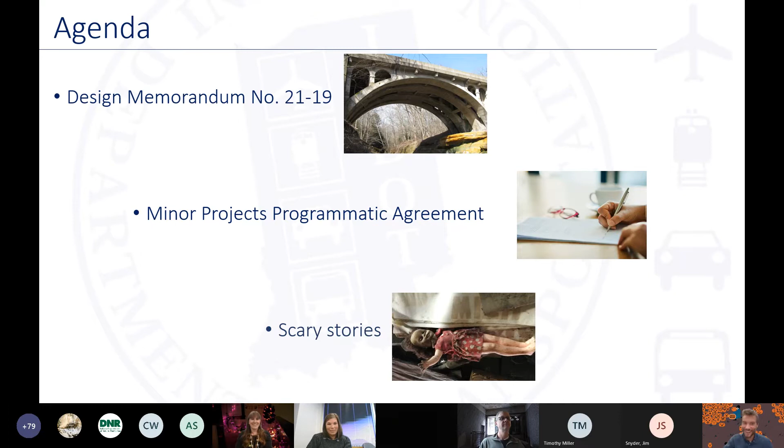So Stephanie and I are here to go over Design Memorandum 21-19. Hopefully most of you are aware of it, either through the environmental listserv or the design listserv, that it did get issued back in September, and it was effective immediately. And any design memo on this one can be found on our website.

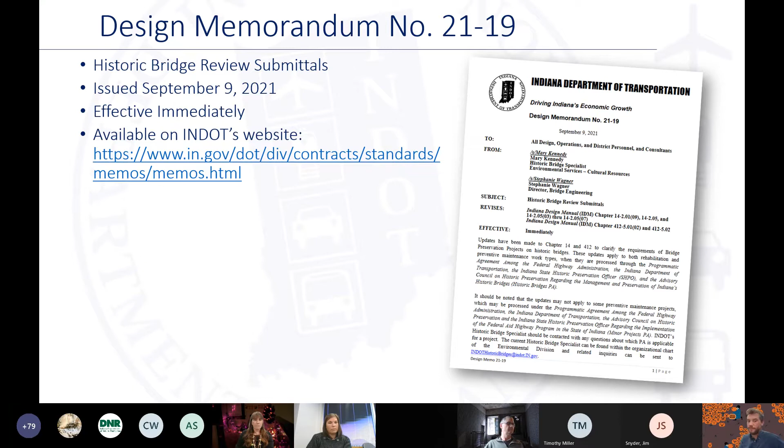So you might wonder why we issued this memo at this time. What's the intent behind this? Basically, it's to provide consistency across the different parts of INDOT, across our different documents, to make sure we have the same guidance in our documents across the board. So these, mainly, it's related to the plan reviews.

In the Historic Bridges PA, which was signed and executed in 2006, it says in attachment B for the standard treatment approach for rehab projects that there should be 3 plan reviews that go to the SHPO for 30 days, at approximately 30% complete, 60% complete, and the final design.

And so that has been around since 2006. It's not something new. We should all be aware of it, but our implementation of it over the years has been pretty inconsistent in terms of how many of those reviews did get done. Some projects might have one or two of them. Some projects did have three, but there were quite a few that didn't have all three of those reviews.

And so we had conversations with SHPO and Federal Highway over the years about the lack of consistency in that, and came to agreement that yes, we need to enforce this. This is in a PA. This is something that we don't want to jeopardize our relationships with other agencies or other consulting parties, the historic bridge preservation community. We need to make sure we're upholding our part of the bargain here and having these reviews done.

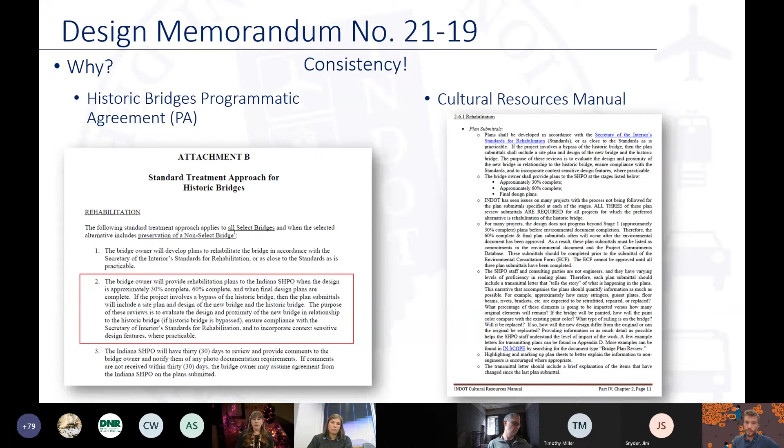So it's just bringing everything up to a consistent format, consistent guidance. So this is just a table outlining all the revisions that were made, and we'll go over each one of them briefly.

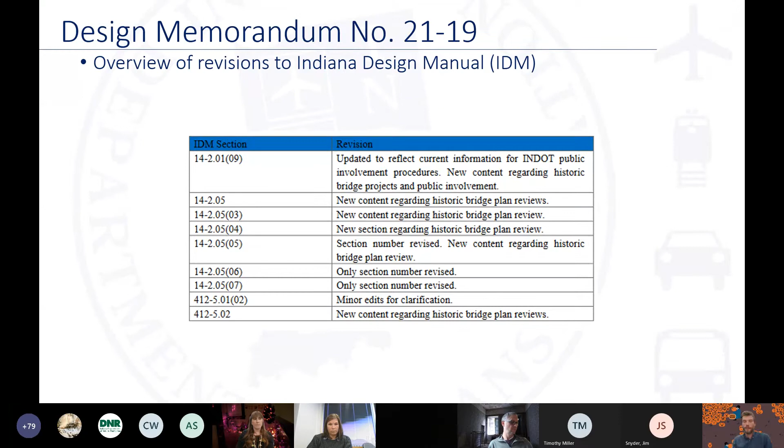The first revision made in chapter 14 was in the section dealing with public hearings. We took this opportunity, since we were making revisions anyway, to provide clarification and updates on public hearings in general, because in the past couple of years INDOT has changed the public involvement process quite a bit, going from centralized public involvement to having the districts manage and control that. So that decentralization, we wanted to update the language here so designers know that public involvement now, you're going to the district staff for that, the project manager.

Another thing we wanted to put in here is that any project processed under the Historic Bridges PA does require a hearing. I wanted to make that clear. We did note that there are sometimes minor project scopes that don't go through the Historic Bridges PA, and they're processed under our minor projects PA. In that case, you don't have to do a hearing, because that hearing requirement is tied to the Historic Bridges PA. If you have a very minor scope of work, some of them in the past we've done is just bridge painting, or maybe some minor sidewalk repair or railing repair, something like that. It might fall under the minor projects PA instead, and it wouldn't have that hearing requirement. Always coordinate with our office if you have a project that you think might fit under that, and we will work through that process and figure out how to get through it.

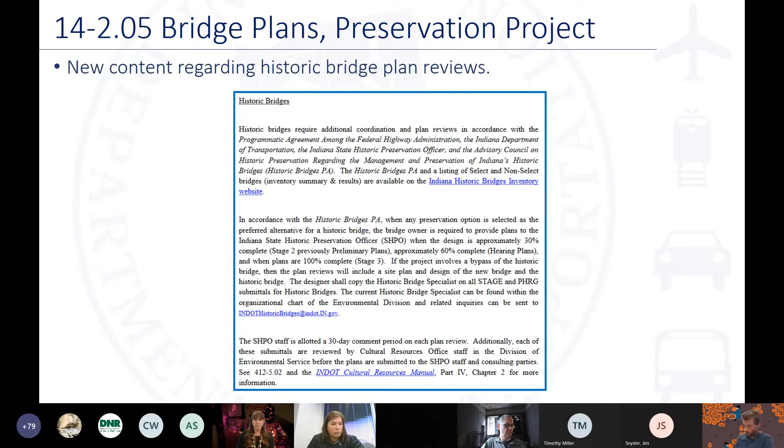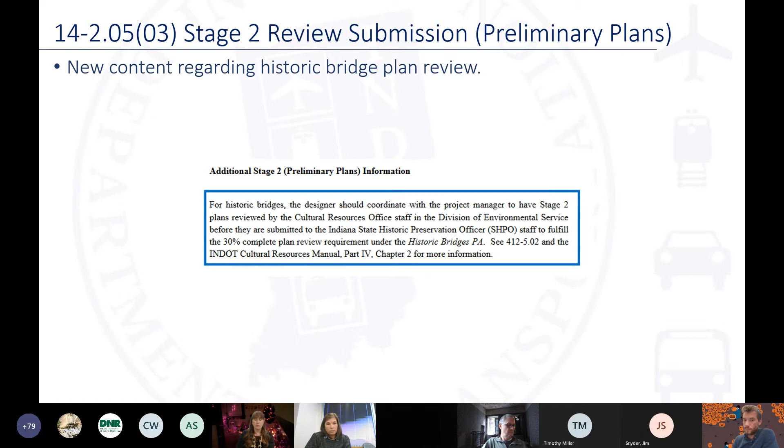Next slide. The next couple of slides just show the different places where it talks about the different stages of plans where we added that there is a historic bridge review that needs to be done. This was related to preliminary plans.

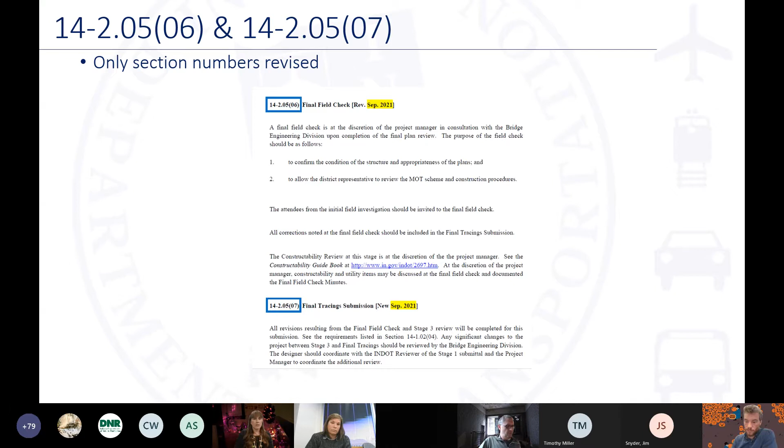Then we just had a couple of sections that needed a revised number as a result of us adding some things in. Moving on to chapter 412.

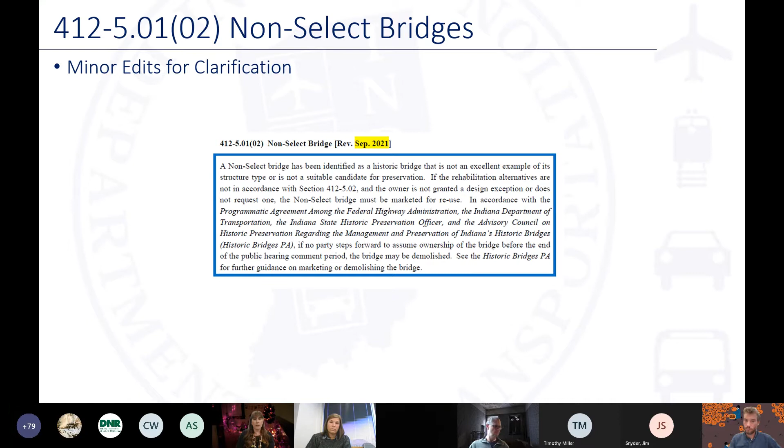We made a minor revision related to the definition of a non-select bridge. We realized that we hadn't quite copied exactly that definition from the Historic Bridges PA, so we were just clarifying some of the language in there so it matched up with the definition that was in the Historic Bridges PA.

And then again, in chapter 412, we have the plan reviews specified out, especially where we're talking about the Historic Bridge alternatives analysis, recognizing that those plan reviews are coming down the line as well, and the comment periods associated with them. We also put in there that if you have plan reviews outstanding when you're working on your CE document, those need to be in the commitments for the CE document. We have to have those in the project commitments database—we want to track those, follow those, make sure they get implemented. We need those plan reviews to occur before the environmental consultation form is submitted, so you can show in that form when they occurred—we sent it to SHPO on this date, they commented on this date—for each one, to show that they've been completed.

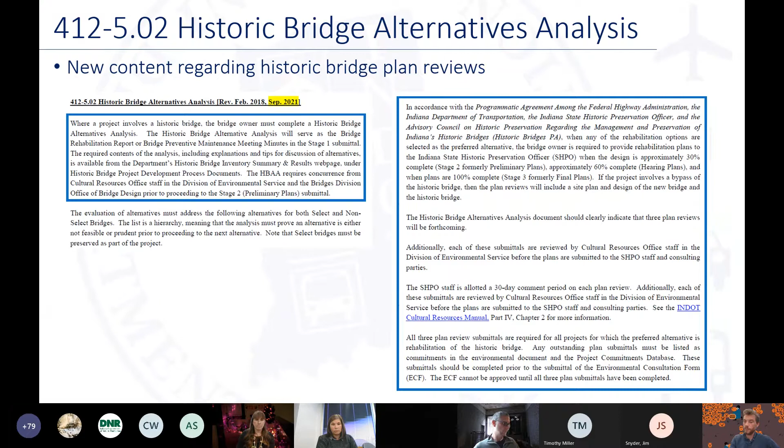So we did have a couple of questions that came up when we published the new design memo. I'm just going to summarize it. It's very wordy on the screen because it's very technical, so I'll try to summarize it, and then Stephanie's going to provide the response we have to the questions.

The first one was related to LPA projects, saying that for an LPA project, you're only required to submit stage 3 for INDOT review, for the bridge group to look at those. So when we have these other plan submittals, how should we go about that? Who's going to get them? How's that going to work when technically for LPAs, only that one is required on the design side of things?

This is a good question. The LPA project development process does reduce the required submittals for LPA projects, but the historic effort and coordination supersedes those requirements. So those are still going to need to come in for the stages we've set out in this design memo. They can be marked for bridge coordination only when you submit them through ERMS, and that way we know that's the purpose of this submittal. My team probably will be reviewing them in some capacity as we support Mary and her efforts to do all that coordination, and she relies on us for that. So we may look at them from that perspective, but not as a complete engineering review submittal.

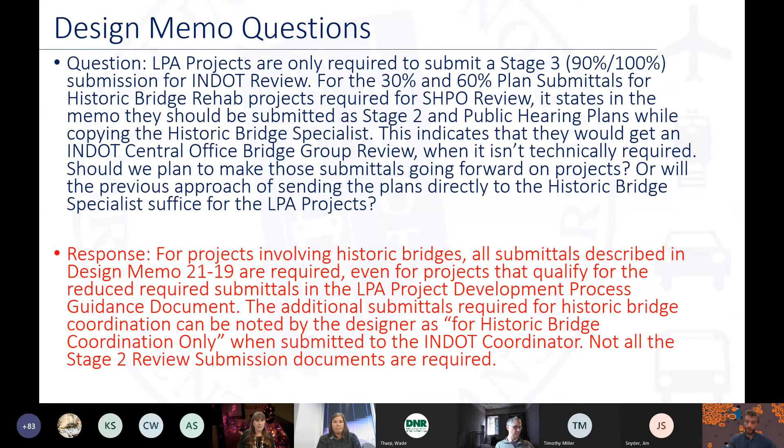Thank you. All right, our next question. Do the 60% or the hearing plans have to be reviewed and approved by SHPO or the historic bridge specialist at INDOT prior to holding the public hearing? We discussed this when the question came in, and we feel like they don't, because you're going to be collecting comments from the SHPO coordination process and from the public hearing, and all those can just be addressed in the next submittal.

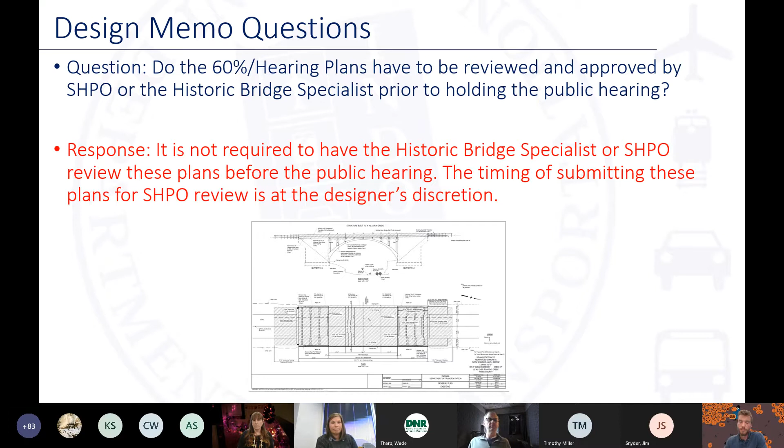Okay, next question. So when the 30% plans, or stage 2, are submitted to the historic bridge specialist prior to them going over to SHPO, we had the question: is it required to submit all the other stage 2 review submission documents, which are listed there on the screen?

So in the past, I wouldn't necessarily know when the plans came in to the bridge group. Often they would let me know, hey, we got these plans. Sometimes I would ask, are you going to submit those to SHPO too, to the consultant? Or sometimes they would let me know. There was a lot of inconsistency in how that developed, so that is a good question. Moving forward, we're going to try to address that a little bit. We got more data than we know what to do with sometimes.

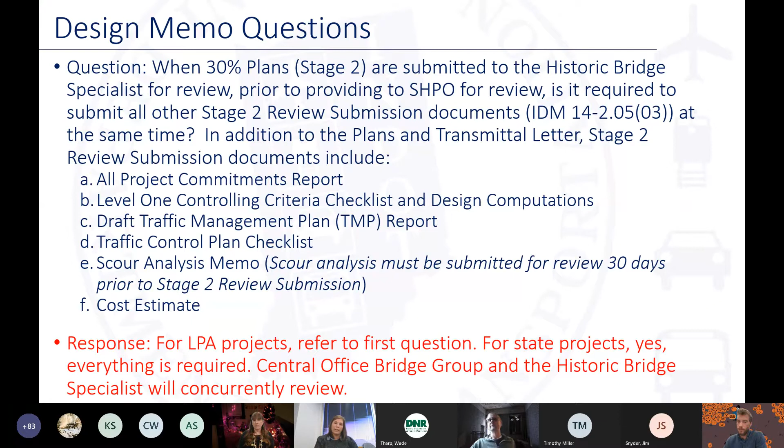So these should be full engineering review requirements for our review checklists. We will be coordinating the historic bridge specialist review to happen at the same time as the engineering review, because a lot of times those are interrelated - the review we're doing directly relates to what SHPO is asking for and the correspondence with them. So those should be full regular stage 2, 3, and hearing submittals, and from our end, we'll be doing that coordination at the same time.

So that was all the questions we had submitted ahead of time. Certainly if you have any other questions, we'd welcome you to put those in the chat or raise your hand if you'd like to ask them out loud. Any other questions or comments about the design memo?

Perfect opportunity, we have Stephanie here today. Go ahead and ask those. Now's your chance, right? You guys didn't tell me to bring a special Halloween background. Well, INDOT Central Office is a little bit scary, so using that background, using just the conference room background might be appropriate. It's true.

Well, I guess I'm surprised no one has any questions. There's so much information in the new memo and revisions. Well, certainly if anybody has them, as we go on, put them in the chat and we'll take a look at them. I think Stephanie stayed. Okay, but otherwise, I guess we can move on. I'm not seeing anything - must have been a great, well-written memo. We covered it all so well. Yeah, and I'm sure you can look forward to a completely seamless future, right? Where no one will have any issues with it, obviously, evidently.

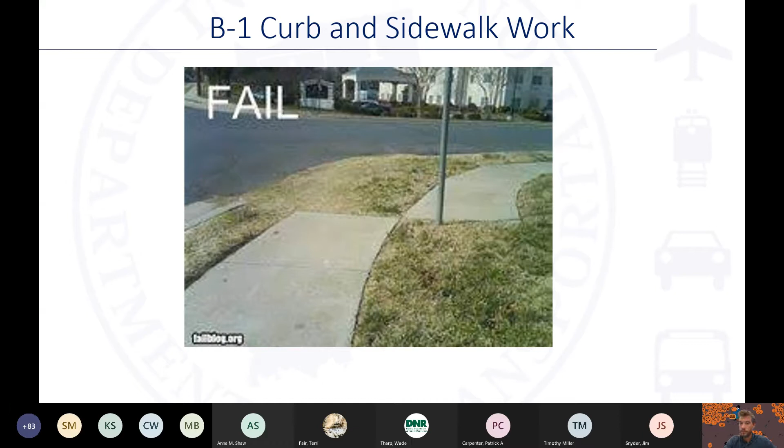So I guess we can go on to the next slide, please. Again, my name is Clint, and I'm going to be talking about the B1 category, which, if you don't know, involves sidewalk, curbs, curb ramps, and the like. And a fun little picture here of the sidewalk that really doesn't look like it was thought out too well. You can move on to the next slide, please.

So some of the best practices for doing the submission for B1: make sure that, and I think Susan touched on this, you list the location where the curb ramps will be updated. If this information is unknown, give us the worst case scenario. Tell us which intersections will be updated, and graphics always help show us the locations so we can match it up with street view and get a better sense of what exactly is going to go on with this project.

With that note, if sidewalk is going to be reconstructed or redone, please let us know where the limits are. We noticed that in some submissions the curb ramps tend to be the focus, with just a side note that there's going to be some sidewalk reconstruction. That needs to be made clear and shown where that's going to happen, because if we need field work, that has to occur next to where the sidewalk is going to be occurring, and not just typically the corners of the intersections where the ramps will be updated.

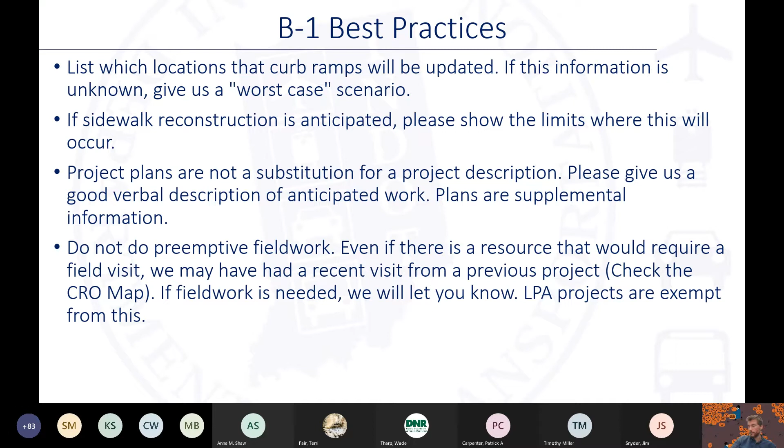With that said, LPA projects are exempt from this. So if you're doing a B1 for an LPA project and you do notice that there are resources adjacent to the project, go ahead and do that field work without us prompting you. Next slide, please.

Now we're going to talk about some of the fieldwork tips. The first one, and it's a big one: if a site visit is required, QP personnel must conduct this fieldwork. We shouldn't be sending non-QP personnel out into the field and then having a QP essentially look over their work and okaying it. The QP must physically be conducting this fieldwork.

We've had that happen a couple of times. If the B1 project is associated with an HMA overlay, only the portions including curb work, curb ramps, sidewalk work need to have field work done. You do not need to go out and document the entire project area that's just the HMA overlay or road work. That being said, this really is more geared towards above ground only fieldwork. So if you have questions about the archaeology, contact one of our friendly local archaeologists here at CRO.

Another good tip is to know the project, what it entails before your fieldwork. When I say this, I mean know which curb ramps are going to be redone, where curb work's going to happen, if there's any sidewalk reconstruction. Make sure that this is well known so that you can go out there and do the fieldwork in one shot. We don't want to get out there, notice that there's something missing, and then have to ask about it, and then potentially need another field visit.

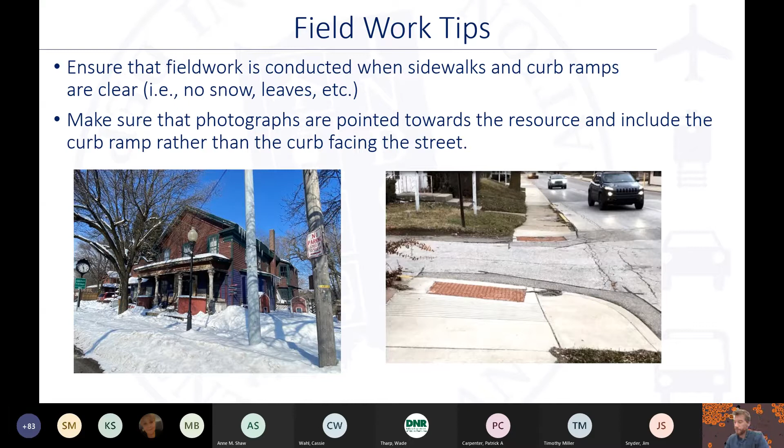Make sure that the photographs are pointed towards the resource and include the curb ramp rather than the curb facing the street. As you notice in the lower right-hand photo, on the other side of the street, it's very clear - you can see where the grass comes up to the sidewalk. There are some stairs back there, which I would doubt would be impacted by the project. But if you look at the nearest curb ramp, you can't tell what is behind there - there could be a retaining wall, we don't know. So it's best to make sure that even if you're taking a wide shot trying to get both of them, you're getting the resource behind the curb ramp so we can tell what's there.

Now, what are considered unusual features? It needs to be well understood that what we're going to discuss here is not an all-inclusive list. So just because we don't mention it here doesn't mean it couldn't be considered an unusual feature. If an unusual feature of a potentially eligible resource is adjacent to the project, document it and tell us what it is. Let us know if it's older or if it appears to be a modern feature or a new introduction. An unusual feature is not just wood, stone, or brick, or something that is an original feature to the structure - anything currently adjacent to the resource should be noted.

Oftentimes modern concrete walls, split rail fences, stuff that wouldn't be considered historic isn't being documented. We do need to know what's there because we are looking at these project areas on street view to process the MPPA forms. And we're noticing stuff on there that isn't discussed in the documentation from the field work. So for instance, modern brick, when we look on street view, we just see brick. And we have no clue whether that's modern or it's historic, which in turn we have to call you or email you and say, hey, what is this that was here?

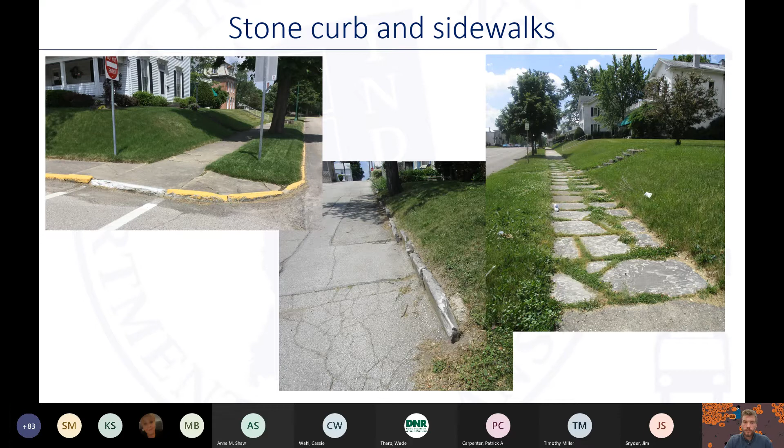So the first one is a common thing you're going to see: stone curb and sidewalks. As you can see, got some stone curb there in the middle, stone sidewalk on the right. I included the one in the upper left-hand side as a caveat for you guys, because I know it's tricked me before, but a lot of times the city will paint the curbs and you can't really tell until you get up close to that curb that that's stone and not concrete. So be on the lookout for those painted curbs, because it could be tricky and it could be stone. Just word to the wise there. Next slide.

Next common feature we see: brick streets, brick sidewalks. Again, even if it's a modern feature, modern brick, make sure to note that and tell us, and grab a photo just so we know what we're looking at. Next slide.

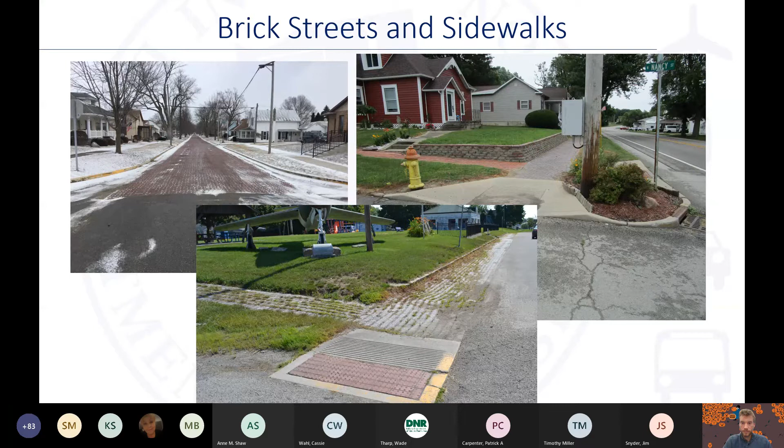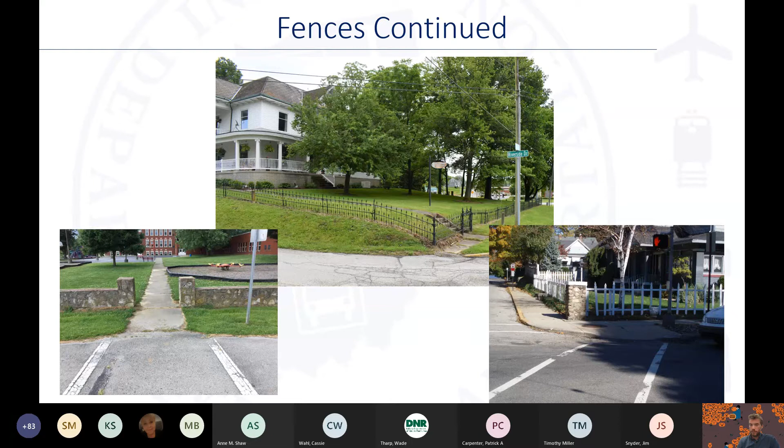More fences. Again, we got an example of stone fence, wrought iron. We got one here in the lower right-hand corner that has got some stone pillars with a white picket fence. Some other types of fences to note are the decorative split rail fences and that kind of thing, just for our knowledge and to help facilitate the MPPA processing. Next, please.

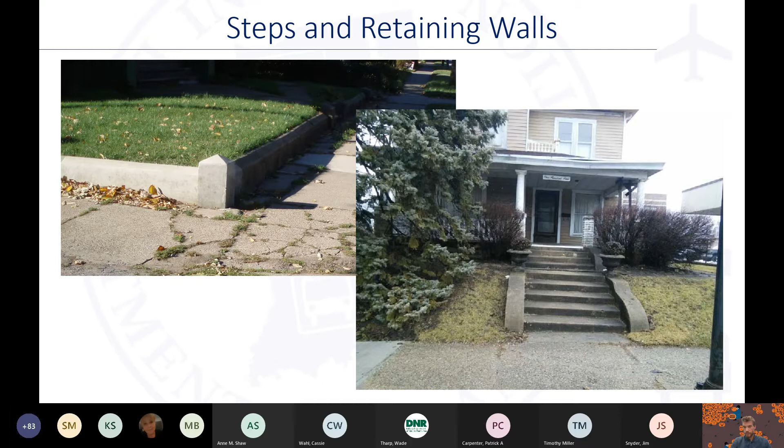Other things include concrete steps, as you see there on the right-hand side. A lot of times these curb ramp updates and stuff go back several panels, so if that is known, make sure that you're documenting anything that could be impacted by the project scope. Retaining walls of any kind, concrete, make sure you note that. And do document whether this appears to be, if you can tell, a new pour, or if it appears to have some age to it and could potentially be considered historic in terms of 50 years or older. Next slide, please.

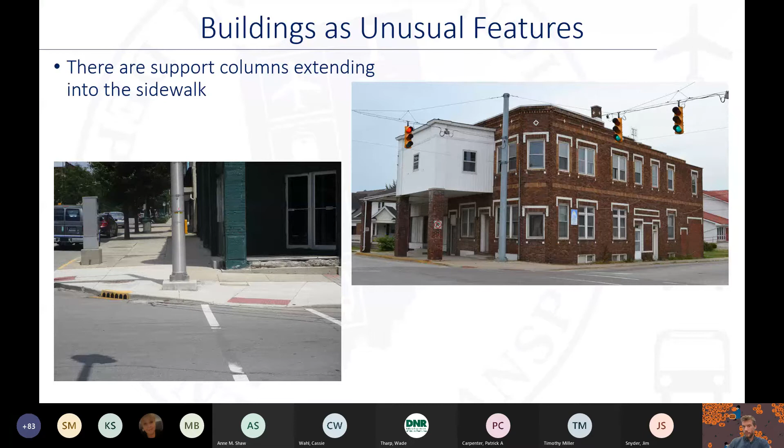Buildings as unusual features. A lot of times we don't think about buildings themselves as an unusual feature, but sometimes that could be the case. We're going to discuss a few instances when we need to make sure we're talking about features of buildings that could be considered unusual features. First, I think most people find it obvious: when building support columns extend into the sidewalk. In the lower left-hand corner, it seems pretty obvious that likely this wouldn't be impacted because it's kind of back behind the sidewalk, but we do need to know that it's there and make sure that's documented. The one on the right is a little bit more risky because it's right up next to there, doesn't look like it's behind anything, so that could be impacted. So just make sure that's being documented and discussed for context. And when giving us this context, it doesn't have to be a long drawn out explanation, but just let us know what we're looking at. Next slide, please.

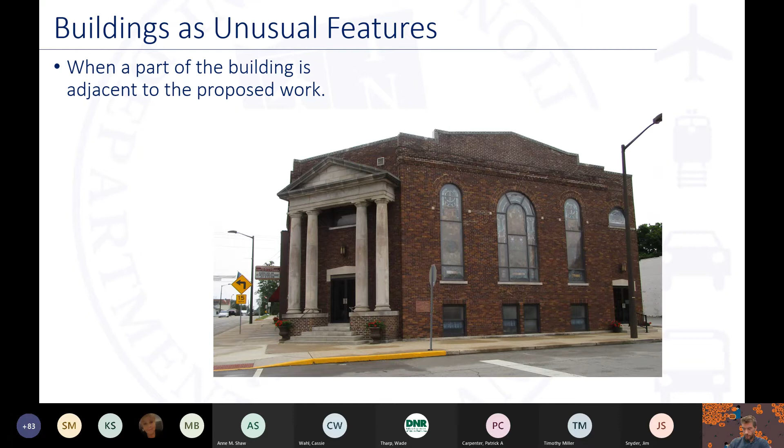Another thing is when part of the building is going to be adjacent to the proposed work. This is similar to what we just discussed, but a little more subtle. It doesn't stick out like the others, but those concrete steps leading up to the entrance are adjacent to the curb or sidewalk, and could very likely be in the area where sidewalk or curb work could occur. So make sure to note what's there.

This one is a little more tricky. These are more guidelines here, but when reconstruction of a sidewalk or curb is going to go right up to the building face, it's kind of a red flag. If the sidewalk is going to be lowered at that location, the stone foundation, or a foundation in general, could be exposed, or if you notice the foundation appears damaged, or if it's stone. Using stone is the one I typically see that's more of a concern, but definitely if the foundation type appears more susceptible to damage, such as a limestone foundation due to age, weathering, and material, it could be more susceptible to damage versus concrete or brick.

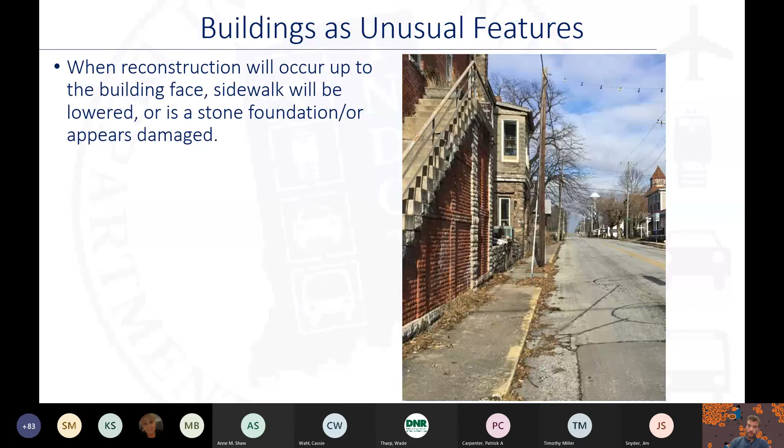So if you see that, make sure wherever that work is going to occur is documented, and tell us what's going on there, whether it'll be impacted or what they're doing to potentially protect the structure from damage. You don't have to go in-depth there. If we have questions, we'll let you know. But if it's not going to be impacted, let us know, and we'll go from there.

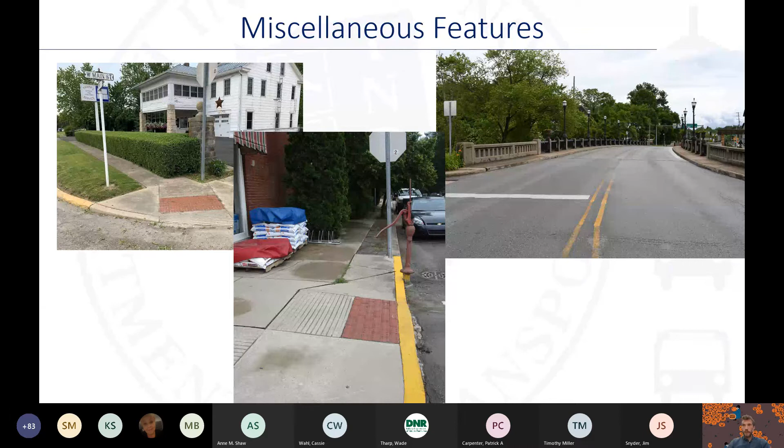Next slide, some miscellaneous features. On the top left we've got a stone pillar next to a resource, and next to that a mid-20th century street sign. The middle one has a pump, which was just kind of cool, just randomly sitting there. The one to the right is a little more tricky and often easy to miss or escape our evaluation. But a bridge that is within the historic bridge inventory, whether non-select or select, is considered National Register eligible, so it needs to be documented, and we need to make sure the work is not going to impact the structure.

Next slide. Modern features adjacent to or within a resource. This is something we've noticed quite a bit, and this is why we really want good documentation on what is out there. We do ask that QPs document aesthetic modern features, for example brick, stamped concrete, faux historic street lamps and street lights, street signs, planters, and that kind of thing that are part of a district or adjacent to an eligible resource, and to make sure you know whether this is modern or historic. You may be asking why do we want this? Well, oftentimes we will put in what we refer to here at CRO as soft commitments to ensure that a municipality or property owner is consulted before these types of features are disturbed or removed.

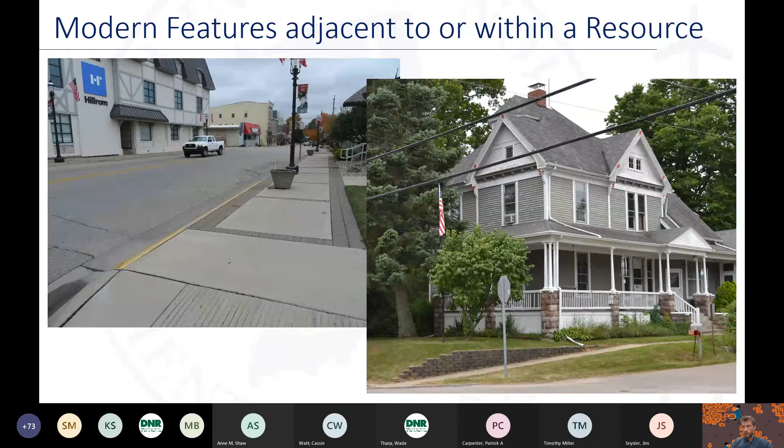So some of the B1 highlights that we just discussed: don't do preemptive field work. We'll let you know if we don't have any previous field work in the area and it is needed. QPs must conduct the field work in person. If the project is part of a HMA overlay that is B1, that includes the curb ramp and sidewalk, only those locations need field work. We don't need evaluation of the entire HMA overlay section, just the B1 curb ramp and sidewalk section.

It is better to over document than to under document. Again, we need to know what's there, and this discussion is just to save time from having to request additional information or ask questions or anything like that. It just facilitates the process and keeps us from having to delay the project.

And again, just because you note it doesn't mean it's going to be a commitment. Most of this stuff, unless it is a true unusual feature that was original to the house or something, doesn't mean it's going to be a commitment. But it gives us the opportunity to assess that as well and determine whether we think a commitment is needed or not. Don't forget to include the modern features within a district or adjacent to an eligible resource for the potential soft commitment.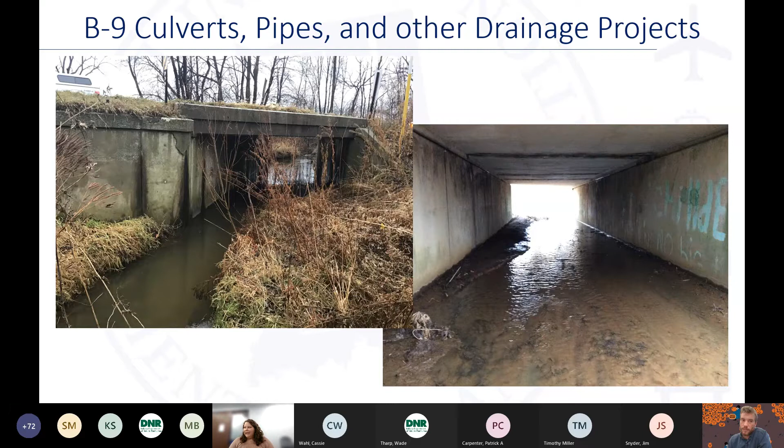Kellen? All right, so I'm going to be discussing B9 projects specifically. Those are culvert pipes and other drainage structure projects. I'll hit on the two above ground conditions and how we apply them generally, since we've had some questions about those two conditions. Then I'll go over some recurring issues we've seen with B9 projects specifically, and again it's mostly about project description. I know you've heard it a couple times now, but we're going to hear it again.

So for above ground B9s, we have two conditions that can be applied. One is what we call BI, which are projects replacing structures in kind, so roughly the same size and in roughly the same location. Now, depending on the surrounding areas, we might consider going from a CMP to a box culvert as roughly in kind, as long as it's the same size generally. But usually if you're going from a CMP to a box culvert, it's pretty different, so that'll probably fall under our second condition, BII.

BII projects are installing a new structure where none have previously existed, or that have a drastically different size in the same location or material, and/or there are unusual features present that may be impacted by this replacement project. So if you've got wood, stone, or brick adjacent to the project, that could also kick it over to BII. We will determine whether the structure is considered new or whether it's a replacement. It's a little fluid, like I said, we kind of use our best judgment and really look at what's going to be impacted, so we're looking at the impacts versus what the structure is actually changing from.

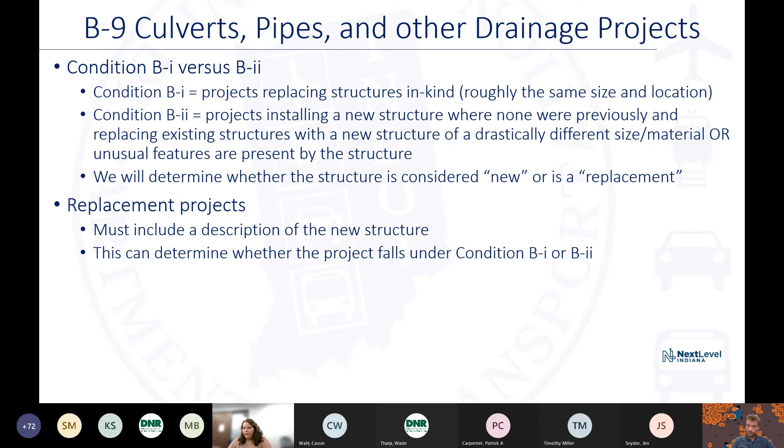But we still need to know what's happening with the structure. Not so much with slip liners, since we know what a slip liner project is, but with replacement projects we need a description of what the new structure will be, because that will determine whether it's condition BI or condition BII. And with condition BII, it cannot be adjacent to a historic resource, so that's a pretty important distinction between the two conditions. We really do need to know what the new structure will be so we can determine whether it's a replacement in kind or a totally new structure, quote unquote.

Our second issue we've seen lately is specifically with pipe projects. These are mostly pipe projects, though every once in a while we get small box culverts, which are also smaller and not in BIAS. So it's projects involving structures that are not in BIAS, but mostly they are small pipes that are being replaced. We do need photos of all the structures that are being replaced or slip lined or whatever is being done to these pipes or small culverts. We need to know what they look like because we still have to check to see if there are wood, stone, or brick features or parts therein of these structures. Now, unlike with BI, these photos do not need to be taken by a QP.

We just need photos of them, and you can use any available photos you have. So if there was a waters report that has some of these photos, we'll take those, as long as we can get a good description and a photo of the resource or structure that's being replaced. That being said, because they're not in BIAS, we don't know where these are.

So we need you to tell us exactly where these pipes are located so that we can review the surrounding area and look at what's adjacent to it. So maps are great, plan sheets are okay, as long as those clearly illustrate where the pipes are on these documents.

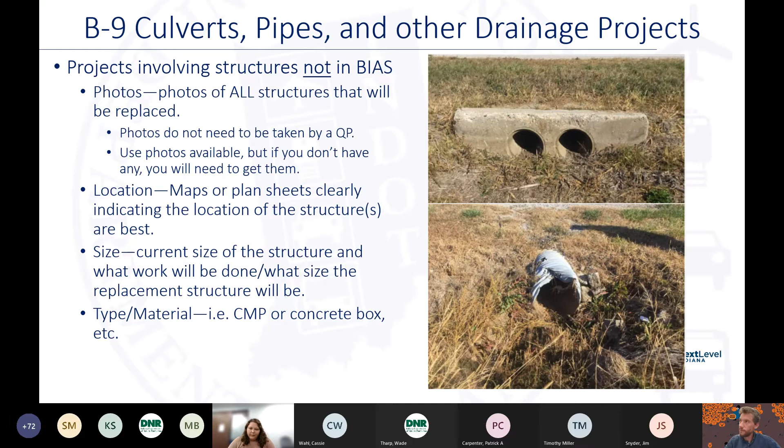I've got an example on the next slide, but we also need to know the size and what it currently looks like. Again, because they're not in BIAS, we don't have the current conditions like we would with a regular culvert replacement, so we need you to tell us what they look like and what is being done. And then the type of material - is it concrete, is it metal, that kind of thing.

So this is an example of information we've been provided from an actual NEPA document. As you can see, we got this table. It told us it was on State Road 32. They gave it a structure number. One of them was actually a culvert, and it was in BIAS, so it had a culvert number. They said the existing size and type, and then what it was going to be replaced with. They also provided maps, and this map happened to also be a photo key.

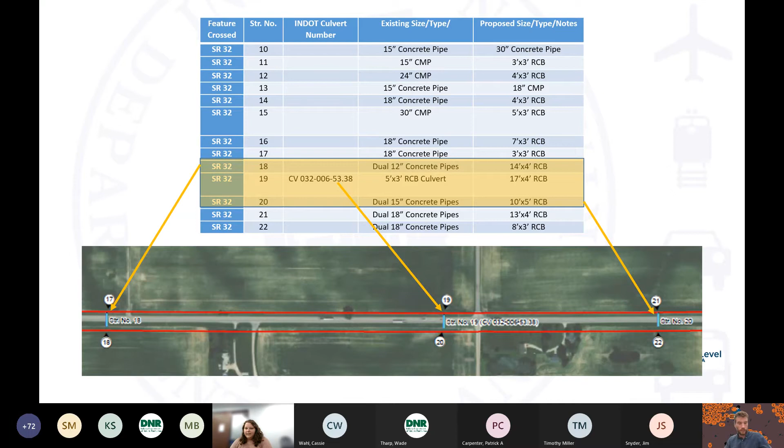So all of those are clearly illustrated from the table. We can look at the table, we can look at the map, and then look at the pictures. It was a lot easier for us to review this project because we didn't have to hunt down this information or ask the consultant again. It was all provided in one go, so this was really great. The photos from the previous slide relate to some of these locations - those are actual documents. The next slide has more examples of this.

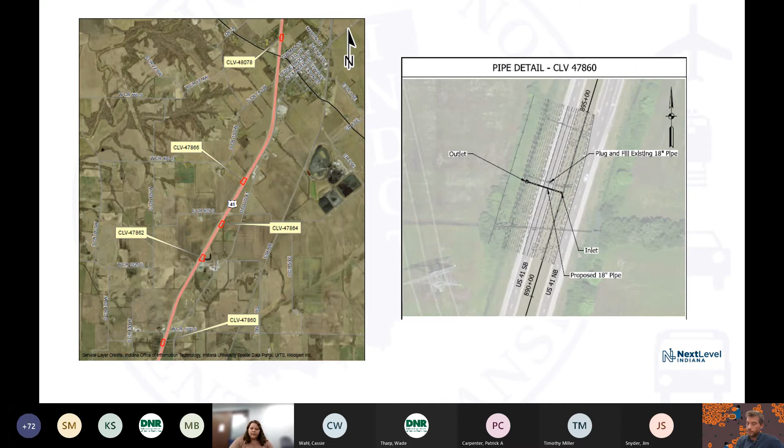So this was a different take. They provided one general map because all of these culverts - well, I guess these were all pipes - were in a very small area, so there was just one map that showed us where it was. They also provided a plan sheet with the details, and on the plan sheet they had call-outs that told us what it was being replaced with. I do think they actually provided a list as well, so it doesn't have to be a table. But any of this type of combination of graphics and photos is great and very helpful for us.

A little behind - so that was really all I had for pipes and culverts specifically.

Now this is a slightly different issue. If your project is going to involve building temporary access roads, if there are easements, and any right of way, we need to know about those so we can include it as part of our review, so we know the whole scope of work. We also need to know about these things because we need to determine if these areas are in previously disturbed soils or undisturbed soils. So for archaeology purposes, we definitely need to know if you're going to be building a temporary access road.

Additionally, these other extra things - extra right-of-way, temporary access roads, different easements - those can alter which category a project will fall under in NEPA. The image you can see is a map. This was an actual project I had - an A1 deck replacement project. Because they had to build these temporary access roads, which you can see in black, it kicked the project into a B6.

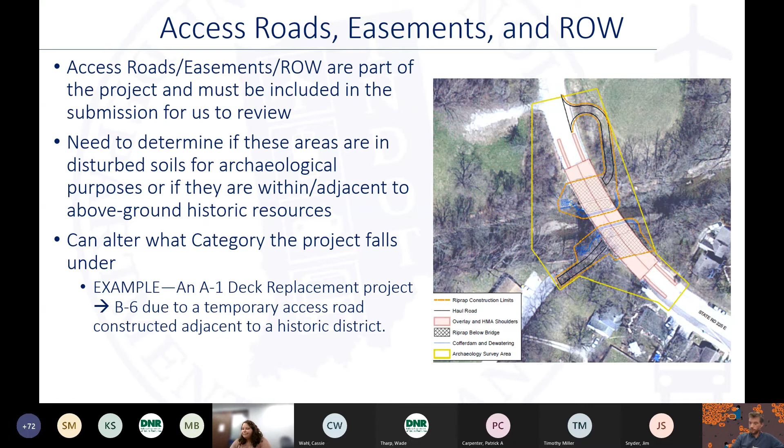Generally, just these are some things to remember, and some other questions that we've gotten over the course of life. Our definition of adjacent is fluid, and it generally changes from project to project based on the project scope and the surrounding environment. So we can't give you a solid definition of adjacent. We look at each project individually.

We generally start with a predetermined buffer area, and then we'll redefine that as the project warrants. But we don't know exactly, we can't tell you over the phone what is adjacent. We'll need some more information. But if you're unsure if a historic property is considered adjacent or not, you can always just ask us. That's what we're here for. Or you could just submit the MPPA form with the appropriate information and the category you think it falls under, and we'll let you know that way.

So pretty nice. And then, as you've heard a million times today, if we don't have all the information, it will cause some delays, because every time we ask for additional information from you with MPPAs, we can restart our 20-day submission period or review time. So you may submit it, and then because we have 20 days, we try not to do it, but we may not get to the project until day 18 or 19, and then we have a whole bunch of questions. So we send it back to you, you get to it in a couple of days, well, then we restart our clock when you resubmit that information to us.